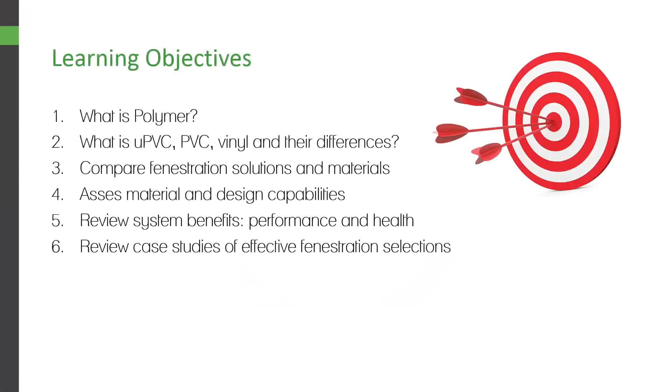So, have you guys ever built or designed anything with Polymer before? No? Okay, so that's not common to hear. In Europe, the commercial construction market has about a 60% share. All the stuff that's like aluminum in the United States, we're using still about 90%. Europeans have always been a little bit ahead in energy efficiency and technology and stuff.

But just to give you some of the basics of Polymer, it's a monomer, a bunch of molecules that are basically strung together to form a compound. Large or long chain molecules composed of repeated pattern of monomers, repeated subunits, and a chemical compound. Each repeating unit is the mer. Repeating units are often made of carbon, hydrogen, and sometimes oxygen. They have unique properties and can be tailored depending on the intended purpose.

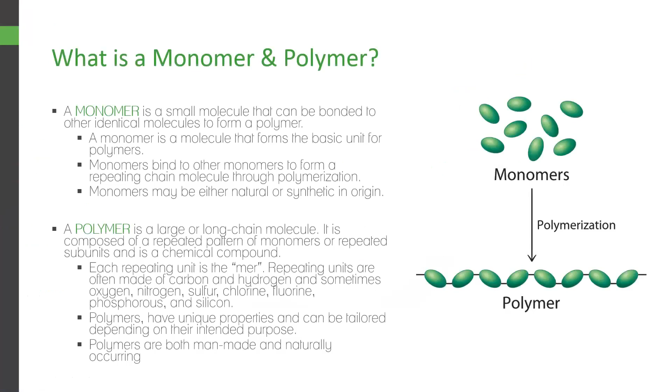So a small difference between this and your standard vinyl window. Vinyl has a lot of materials that will make it soft, BPA, phthalates, those types of things. They make the product softer, so you can't build as tall. But some of the benefits of the Polymer, again, electrical insulation, processed in various ways. Materials are seemingly limitless, range of characteristics and colors, and used to make items that are alternatives. So something that's more energy efficient is the idea.

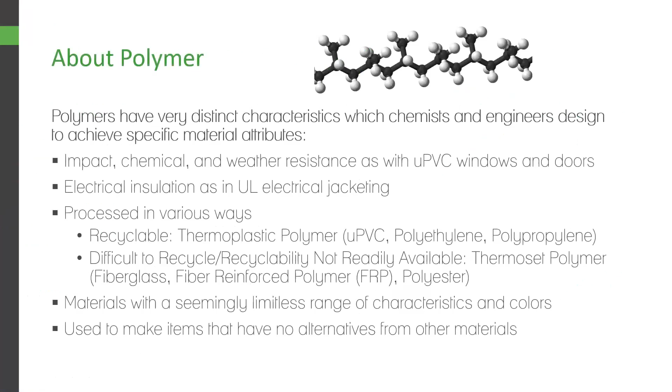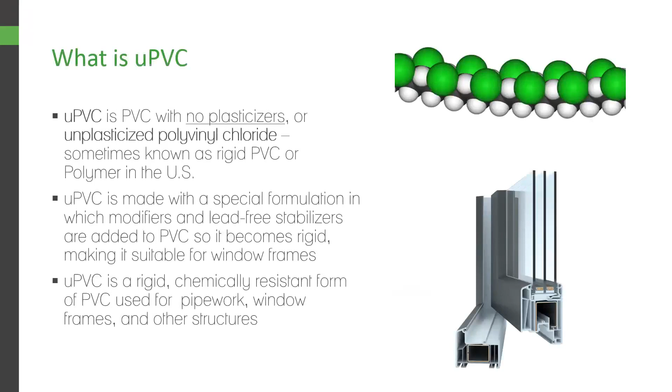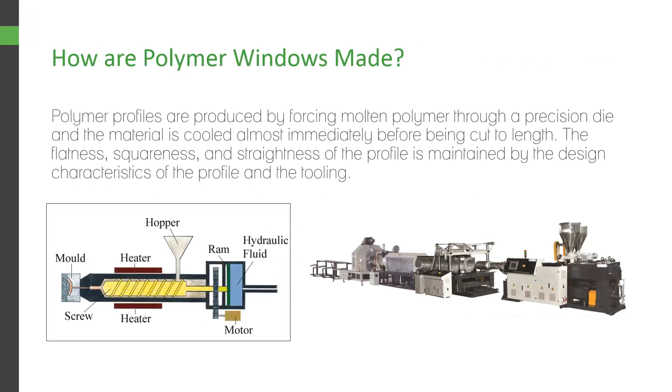uPVC, unplasticized polyvinyl chloride, sometimes known as rigid PVC or Polymer. Again, it's going to be chemical resistant, fire resistant. It's not going to have the same problems and issues as a vinyl product does. It's created through an extruder, very common. Best thing I can tell you, it's like a really big Play-Doh press. You heat the material up and it's extruded to specifications that you are looking for.

How it's made, you can see some of the welding and the welding reinforcements here. This is one of the mock-ups. This is one of the operable windows here. You can see, pass it around. Now the operable unit, if you pull it open, you'll be able to see the standard profile of the window to give you a better idea how it works and the steel inside.

So it would only be fair to talk about the evolution of Windows when you're talking about this product. Originally, when we were using Windows, it was all wood. Cutting down a lot of trees for these products, which wasn't really beneficial for the environment.

And wood was great. It was nice. It was warm. It looked beautiful in your house. However, some of the problems and drawbacks: it can get wet. Moisture is an issue. Bugs, termites, ants, that kind of thing can eat the inside of the frame away. Additionally, it can catch on fire as well.

So they wanted to also build taller, and you couldn't build large structures with wood windows, so they decided to move to aluminum. So late 60s, early 70s, you're seeing a lot more aluminum windows in structures. They're big, huge glass plate windows. You'll see in like California and stuff, which were great. They were beautiful. One of the drawbacks, though, is that they're not very energy efficient. After the energy crisis, they found out very soon that having big, large aluminum and steel windows wasn't great for your energy costs, so they wanted to make something a little bit more efficient.

1964, the first vinyl window was introduced into the market. Vinyl Industries created a vinyl product, which was great, but it was using a lot of recycled materials. A lot of these green and white lawn chairs you'll see outside, you can recycle those and make a vinyl window, right? But they have problems and issues.

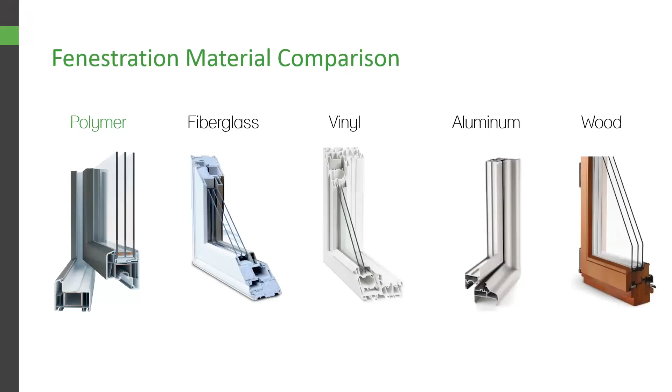So sound attenuation is important for people, and energy efficiency is also important. The polymer product that we have has led to a lot of passive house structures, a lot of LEED structures that we do in the DC, Maryland area, where people are trying to be more energy efficient these days.

So one of the first questions I get from a lot of architectural partners is, well, how much does it cost? And the real answer is it just depends on what you're looking for. Unfortunately, it's hard to say, I would have to look at a project in particular. But on average, you should be saving 10 to 12% on an apples-to-apples comparison with aluminum.

A lot of the aluminum products are going to move energy through them 1,000 times better, which is not really great for your energy costs. Our STC rating starts at 32, which is a lot better as far as energy efficiency is concerned, compared to vinyl.

With aluminum, there's a wide range just because, if you were looking for something that has the same sound attenuation and energy efficiency as our product, apples to apples, we're going to beat them every time. More importantly, on the back end, the operational savings are substantial.

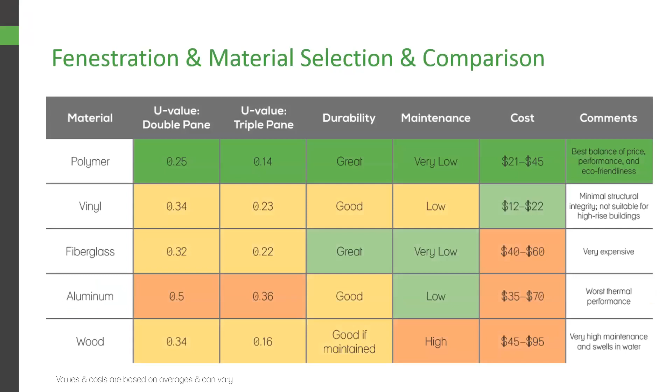We've done a number of case studies, we do retrofit jobs as well. One of the schools that we did, I believe they were saving about $50,000 a year annually on their energy costs. So the project basically paid for itself. Return on investment was pretty substantial.

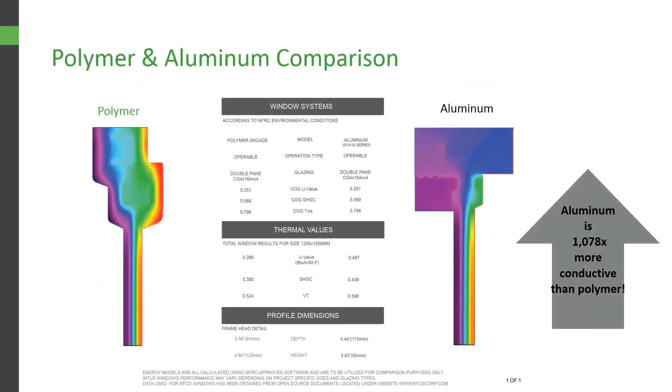Aluminum is 1,000 times more conductive than polymer, which is pretty standard. If you live in a high-rise or get close to these windows in the wintertime, you can probably feel the temperature difference. It's not great, especially in the Northeast, having big metal windows in your house or building. My boss's girlfriend has her desk right up against the window and has to move it back 3 or 4 feet every winter just to not freeze. It's kind of ridiculous. So having something more efficient is beneficial.

Some of the advantages of polymer fenestrations: strong and cost-effective. On average, timber is 20 to 30% more expensive, and aluminum is 30% more expensive than this product, so you're saving money upfront. Excellent insulation properties, which is good — number one, energy efficiency and sound insulation. Resistant to chemical and termite attack, doesn't shrink, crack, or change under harsh weather conditions. Some of the problems with vinyl is it will start to fade and deteriorate after it heats and cools a number of times. Extremely low maintenance, long-term savings, extremely UV resistant, self-extinguishing.

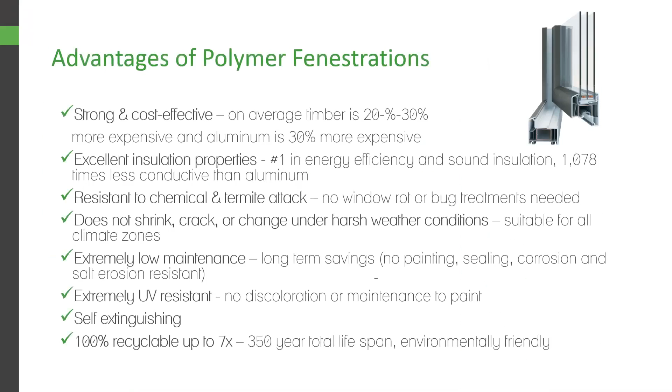100% recyclable up to 7 times, so when it can be recycled, that's great, it's better for the environment. In addition, every single window that we sell, we plant a tree. To my knowledge, we're the only organization that's planting a tree for every single window that we sell to our customers, trying to offset the footprint.

Some of the capabilities: low air infiltration, as low as 0.01, better thermal performance. We're starting at 0.27, where other people are starting high, 0.36, 0.40, which is great. Sound attenuation options — again, we can reach STC 46, which is virtually silent.

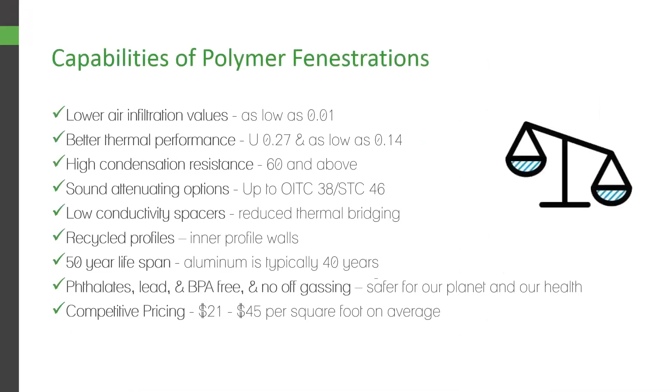We just finished the Moxie downtown DC. Originally we were contracted to do the new portion of the structure, however the owner was so impressed with the windows and everything, he had us retrofit the old portion too. It's right off of K Street, and in the middle of the day, one floor off in the hotel rooms you can't hear any traffic. If you go to a hotel room, you're looking for a clean bed, clean bathroom, and not a lot of noise. So sound attenuation is also very important for a lot of our customers.

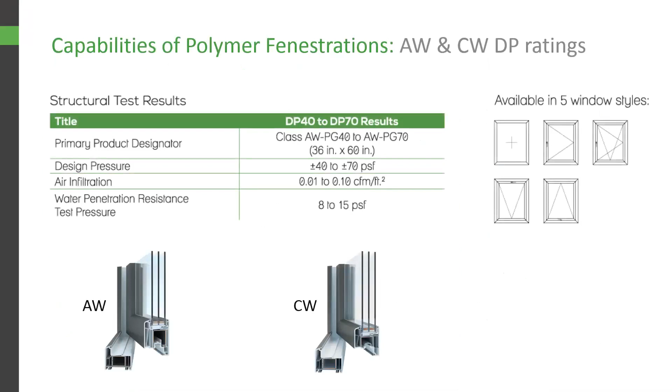Some of the available window styles — again, we don't do a hung window, we don't do sliders, but we can replicate the hung window doing a fixed over operable. We also have the European tilt and turn, which operates two ways — you can pull it open or tilt it open, which is good. We also offer awnings, casements, and other standard window types, plus double pane, triple pane, and a number of laminate options for the product. As you can see, these are some of the styles.

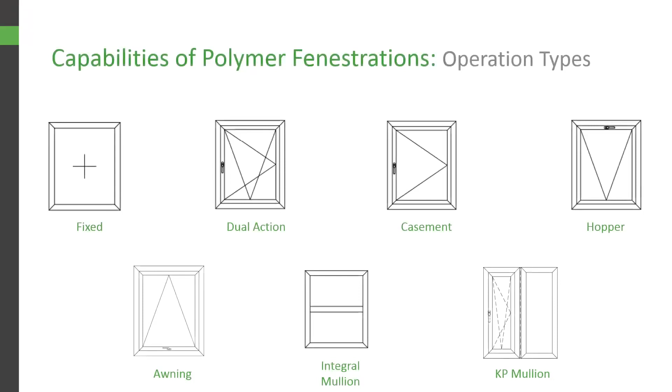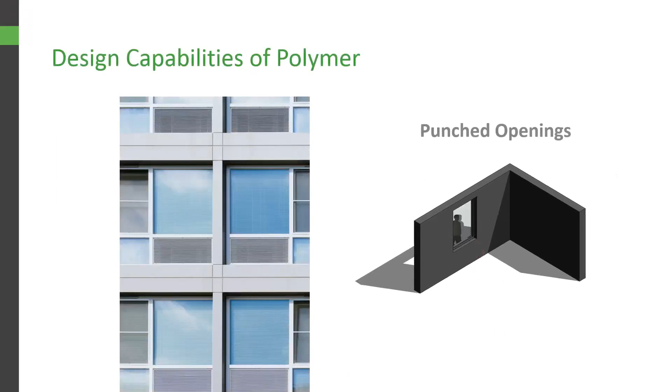And some of the capabilities. So before we arrived, Kendall sent me an email. I know some of you have heard of our organization before and had some questions and concerns about the product and what its capabilities are. So we are able to do punch openings. We can do window walls, and we can do storefronts. The only thing our organization does not provide is common use doors. The storefront system we provide will tie into any other storefront door, YKK, Kawneer, et cetera, but the Polymer door just isn't designed to be opened 8 million times a day and hit with baby strollers and coffee cups and all kinds of stuff all day.

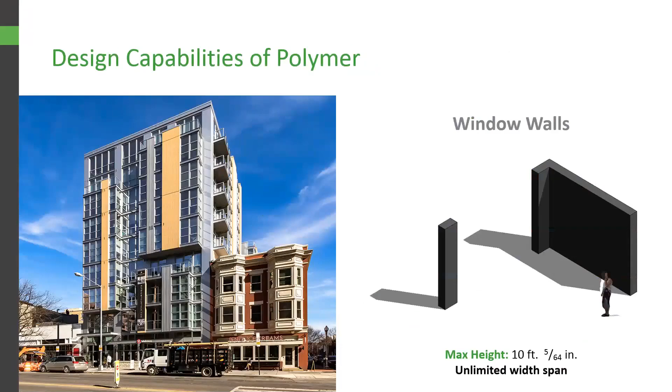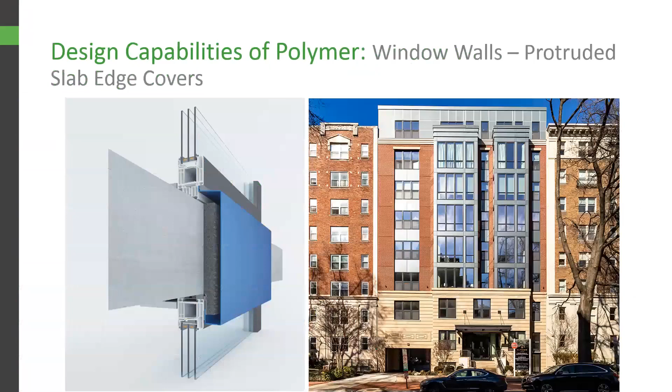Slab edge covers. So this is just a brake metal design here. You can see this one, it's a protruded slab edge cover, just to give them the aesthetic they were looking for. You can also do flush ones, right? And this is a brake metal solution that's provided during the install.

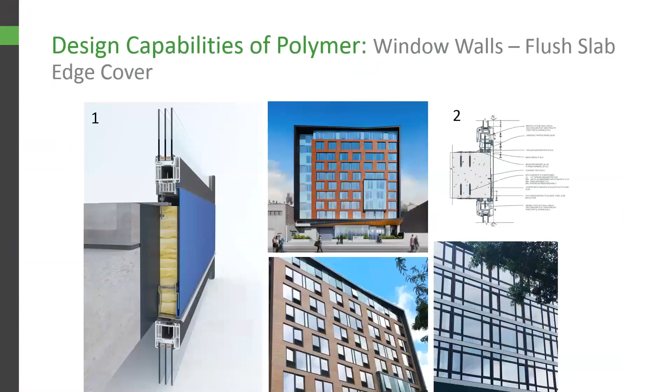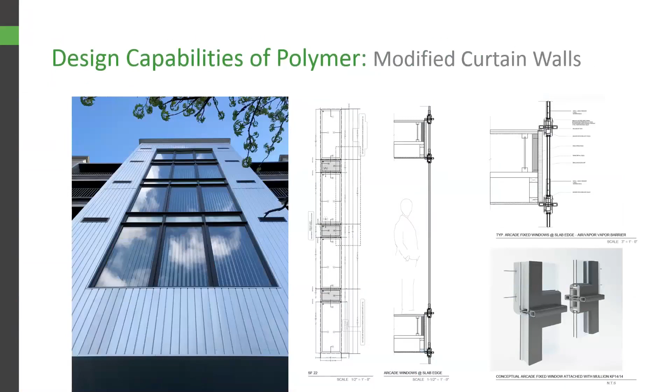So some of the modified curtain walls that we can do. I know it's hard to see the writing here, but I'll be able to provide a presentation if you're looking for it. However, you can see some of the window walls that we can provide. We can't do a full curtain wall just because of the way the window is designed, but still some stuff that needs.

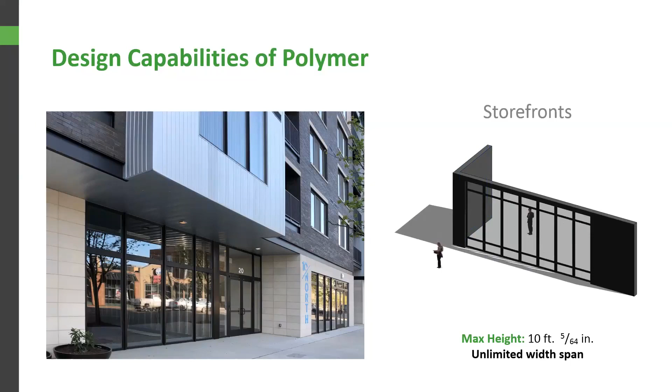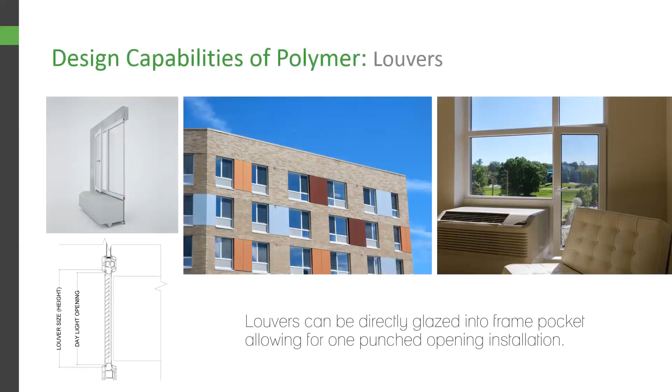Another example of a storefront, full integration with any aluminum door. And we do terrace doors, balcony doors. As long as they're not common use, we can provide those as well. They integrate with all of our systems, which is great. Magnetic catches. The PTAC louvers there for air conditioning systems.

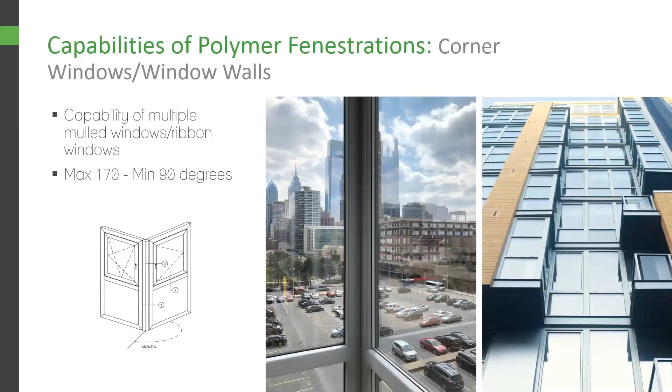The corner window wall here. Some of these can be difficult to provide, but using the right one, they get it done. 170-degree maximum, minimum 90 degrees there. We do have ADA compliance as well. I know that's important. The disability is important to a lot of our customers as well. We'll make sure that you're making everybody comfortable.

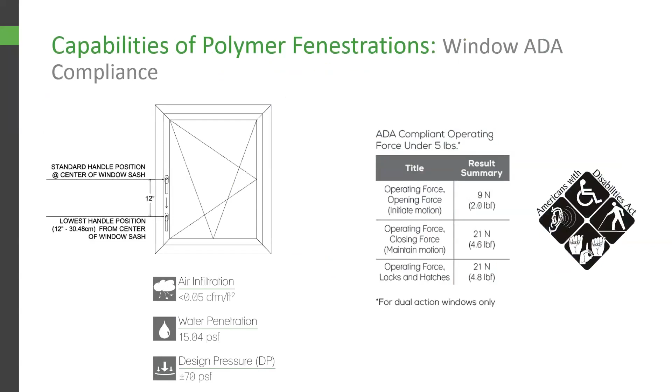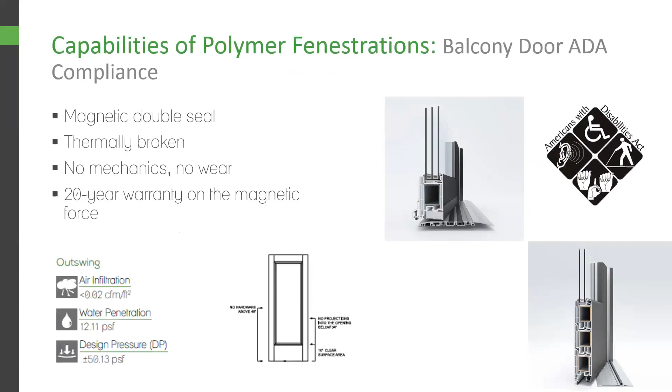Talked about the magnetic double seal, thermally broken, no mechanics and no wear, 20-year warranty on the magnetic force, the balcony and terrace doors. So again, some of the other window sizes. As I mentioned, we can do 14 feet tall. Feel free to stop me if you have any questions too. I'll talk a lot.

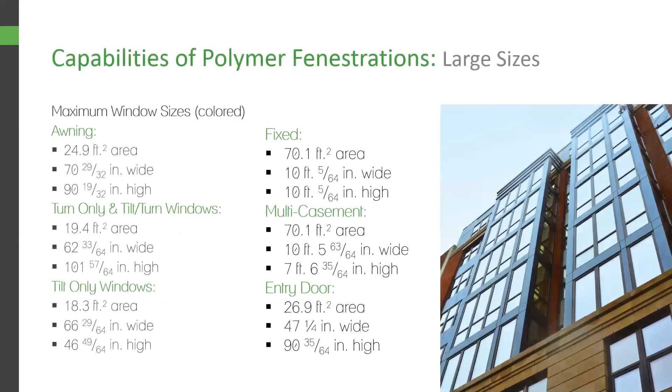So one of the benefits of doing a project with us is that we will give you the engineering. We use all the software that engineers do, and we'll give you wind loads and calculations. Sometimes, I've never heard of Grimmer Parker doing it, but sometimes people copy and paste the spec. I've heard it happen before. And we'll get a U value that looks like something that's built in Miami, and then a solar heat gain coefficient, which is a lot different. So we'll offer other solutions as well if you see something like that in the spec that you wrote.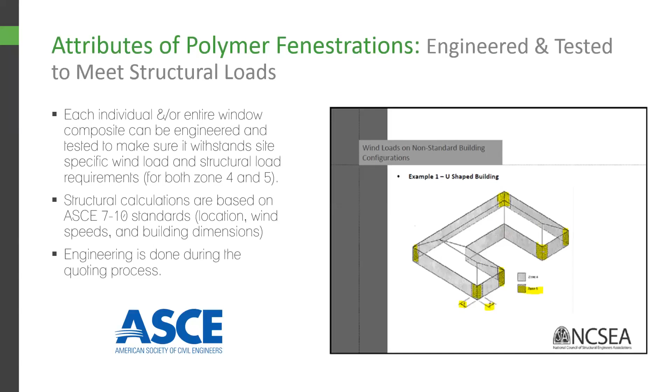They do have limiters as well, like 2 to 4 inch. They're bigger in New York, but that is available.

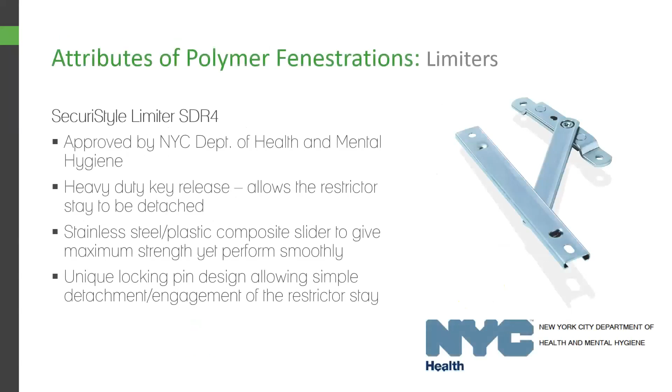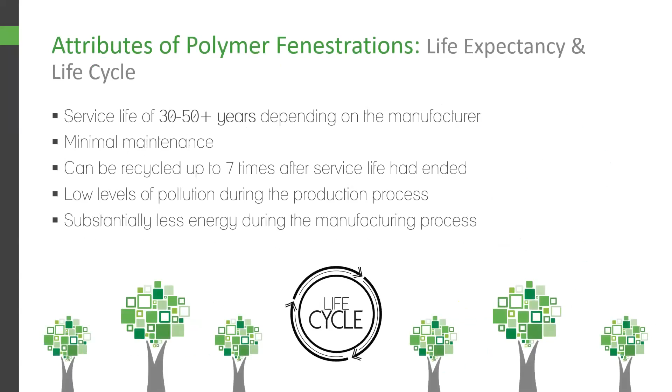And the life expectancy. So this was another question and warranty question that we had from some of the architects. Service life 30 to 50 years, depending on the manufacturer, on Polymer. Minimal maintenance. If there's any damage or anything during the install, you can just get a pen. Obviously, if it's like catastrophic damage, it would have to be replaced. But very low maintenance, can be recycled 7 times. Talked about low levels of pollution during the production process. Substantially less energy during the manufacturing process as well, not to mention the tree planting.

These are the standard colors that the product comes in. We currently do polymer and anodized silver to give you the aluminum or metal look. You have a warm stone, dark bronze, black smooth, and then the white. The material comes out naturally as white, so having a white interior, color exterior is probably your lowest cost option, but you can do a 2-tone.

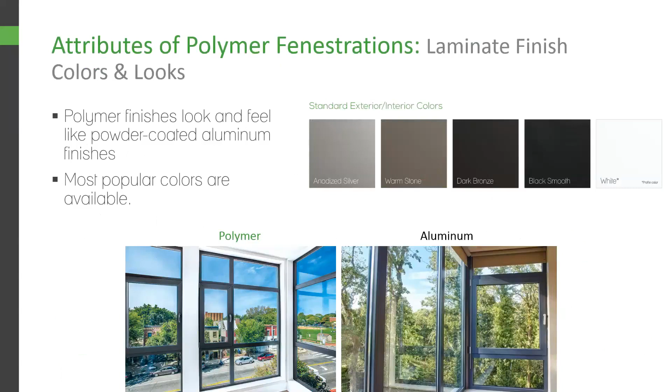As I mentioned, if you needed something a little bit more exotic, as long as the material cost is high enough, we could do a custom color for you. And then we have the laminates.

EXOFOL laminates, they're amazing. These help to give our windows a little bit more style, color.

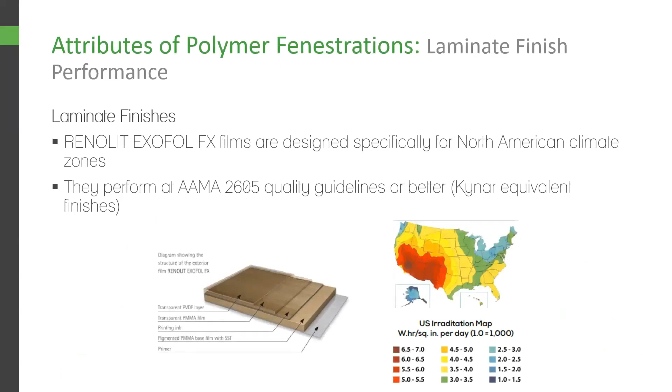Let's guess, what is the quantity you need to have to get a custom color? I think the material order needs to be about 750 to 800,000, because it's not like they're spray painting the windows or something. You have to buy dye in a large roll. So if the material order was 800,000 or more, it would make sense. Otherwise, as far as the price point is concerned, it wouldn't be cost effective for you to do the custom color.

Multiple gaskets. You can see inside the window here some of the gaskets that are put into the window to give it a little bit more energy efficiency. Low air infiltration values up to 0.01.

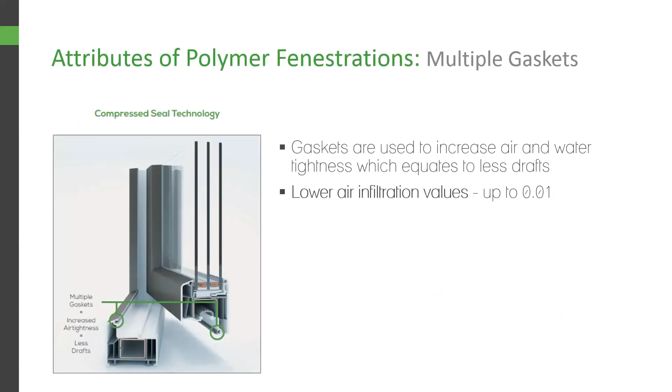Some of the health and energy benefits - again, polymer windows provide a way to make low and high-rise buildings in any project category energy efficient and healthy in any climate zone. 75 to 90% less energy used for heating and cooling. If we're talking to your developers, your customers about saving them 75 to 90%, they're excited about that, right? Even if you're going to sell the building, it makes it a little bit more attractive that the structure is efficient, okay?

Protection from energy price increases, excellent sound abatement we talked about, reduced overall ownership costs, energy tax credits and funding is available, increased resale value, right?

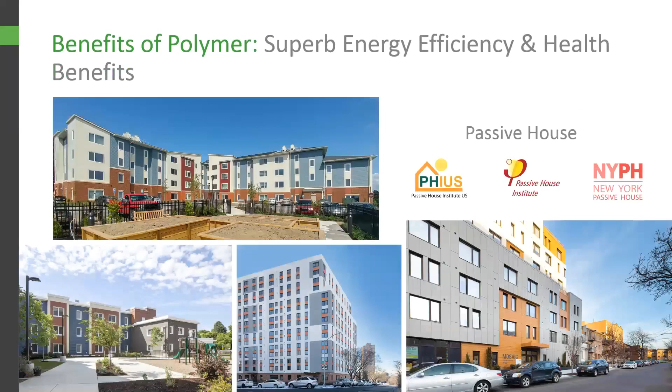Also, the product leads to passive house structures. This is one of the largest passive house structures in the U.S. I believe this one is in Pittsburgh. On the top left there, it is 67,000 square feet, 4 stories, in Pittsburgh. We're going to be working on a new, very large passive house structure in Silver Spring. But currently, this is the largest one.

When you're talking about passive house, it doesn't just apply to residential homes. It can be large buildings and stuff as well. But I think they got like a $1 million tax credit. Yeah, so they got $1 million tax credit with that project.

But again, it just makes it more exciting. Now with passive house, some of the efficiency values that you're trying to reach - on average, a passive house structure is going to be about 10 to 13% higher in cost than the standard material, but when we're talking about 75 to 90% energy savings, it makes up for it.

This is another case study here with the HANAC Corona Senior Residences. This one's in Corona, New York, 57,000 square feet. I think we did a triple pane there as well. The Forte triple pane, steel reinforced, yeah. Dual action windows and the storefront we did there with the door.

So, it depends. It depends on who you're asking and who the customer is. No, I mean I'm saying it depends on who you're servicing.

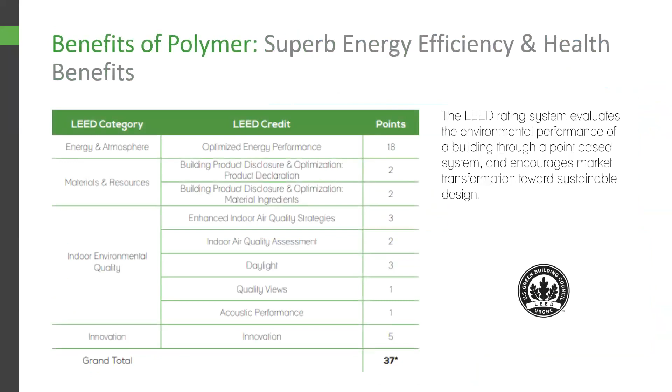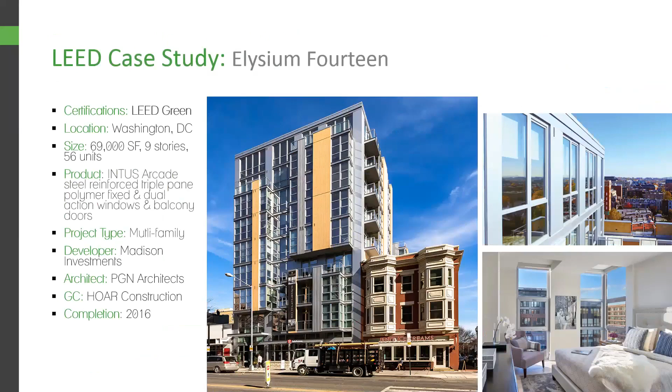But noise in general is one of the things people complain about the most. So again, sound abatement, sound attenuation is important. With some of the schools that we retrofitted, there was a noticeable difference in the students' performance, especially the ones that were next to train stations and whatnot.

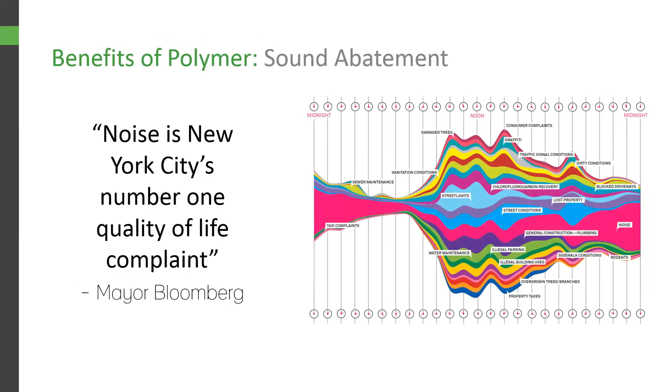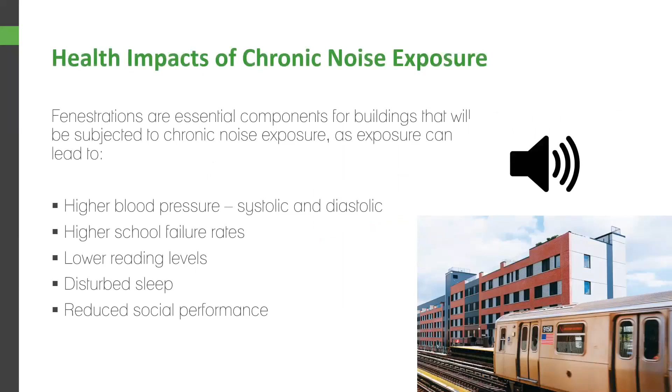Oh sorry, so this kind of speaks to your point about the triple pane window. I'm sorry, what was your name, by the way? Daniel.

To speak to your question about triple pane windows: STC ratings, the decibel levels, it's not a linear scale, it's exponential or logarithmic. Going from single pane to double pane, just adding that pane of glass, you're increasing the STC or decibel level by an average of 7 decibels, which is noticeable. Going from double pane to triple pane doesn't do that much. Going from STC 25 to 26, or 27 to 29, that increase is barely perceptible.

So really the important part here is we're able to get the higher STC ratings by laminating the glass while still keeping the cost down low. It's another reason why triple pane is very specific, it still has its uses, but double pane is the main one.

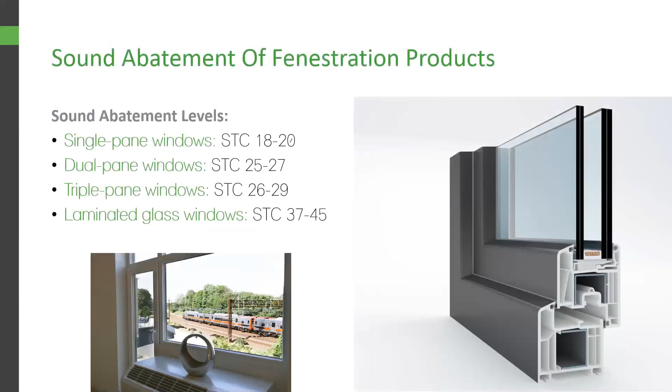So this is what we do. We're actually, with the presentation we have on sound abatement, really trying to educate people on uPVC. You'd be shocked how many architect firms haven't heard of it. It's really cool that you guys are looking at it.

So polymer window frames, laminated glass, non-metal spacers, these are all things leading to some of the sound abatement and attenuation. Also the spacer inside the product is important, and that's going to affect your thermal values and whatnot.

Originally spacers were designed just metal, very conductive, letting energy, sound, etc. through the window. With some of the technology and everything, they started to do aluminum spacers with thermal breaks.

They added a desiccant here, so you can see these little rocks and pebbles inside the mock-up there. That will absorb any little bit of moisture that happens to get in between the panes. And then the warm edge spacer here, which is actually polymer, very efficient, doesn't give you the seal failure that's common in a lot of metal aluminum windows.

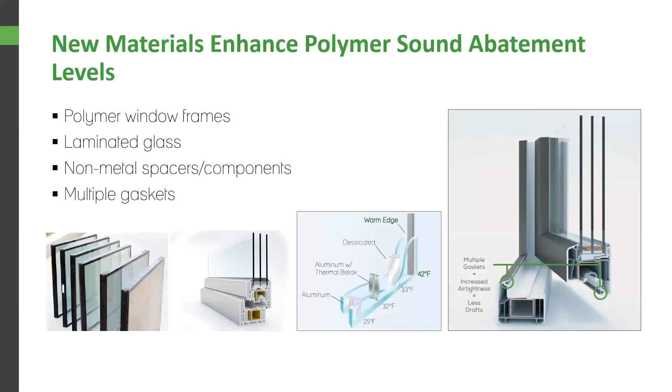Do you guys manufacture your spacer? Swiss spacer. And this one here is in Brooklyn, New York, I think that was on the product catalog.

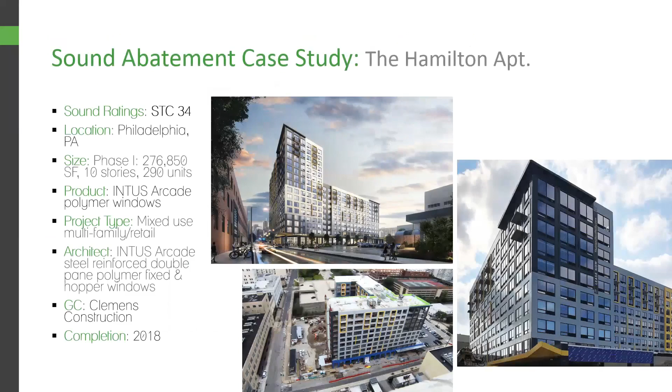This is the Hamilton in Philly, this is the arcade double pane. Macy's finished that one last year. And the Marriott Hotel, the Moxy, again.

Originally, as I mentioned earlier, we were just designated to do the new portion, but the owner liked it, and we had to retrofit the old part. We are one of only 3 designated vendors for Marriott and Hilton. We're the only one that's non-metal, so hospitality has been a big push for our organization. Do you guys do any hotels?

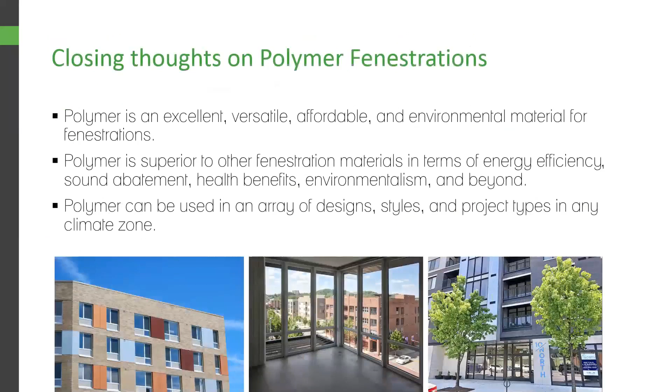So, closing thoughts on polymer again: excellent, versatile, affordable, environmentally friendly material, superior to other materials like aluminum or wood, health benefits, and it can be used in a number of designs, not just passive house structures, but buildings 40 stories tall.

Any additional questions? Are all your windows manufactured in Germany? Poland. Poland, and shipped here? Correct, correct. So currently we're building another factory.

That's true, but we do a lot of stuff beforehand and afterwards. We're on site when all the stuff is delivered, just making sure, and we have attic stock as well. So we do a lot of things like that, because making the window the right size, otherwise it's got to be remade.

So yeah, that could be an issue, but it's one of those measure 2 or 3 times, cut once kind of deals where we try to eliminate those problems. We have active claims management, which helps prevent any other possible issues, but that hasn't been a problem for us so far.

So to cut back on that, Eric touched on it, but with active claims management, whenever there's an ongoing project, there will always be a business developer representative that visits the site at least once every 30 days, just to keep track of if there are any windows that are broken, damaged, or for whatever reason.